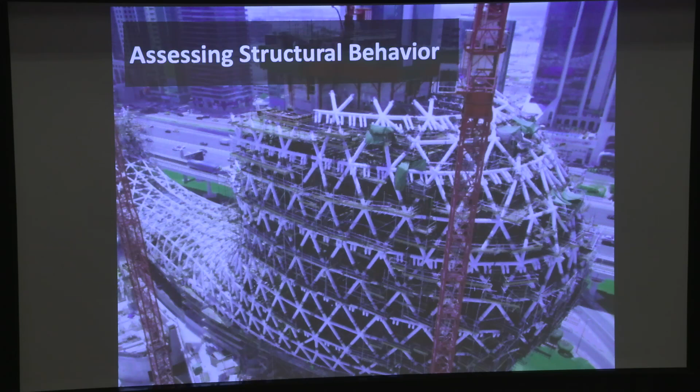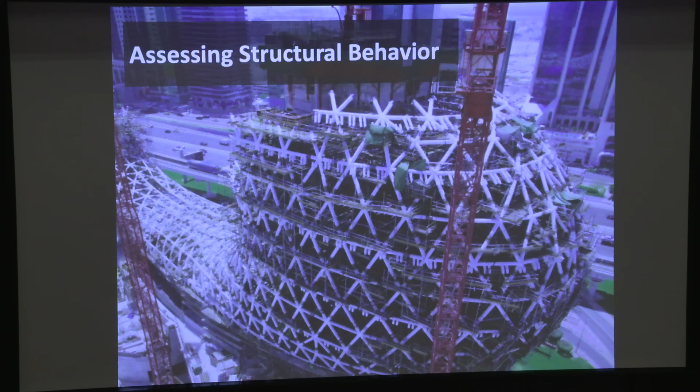So this is a Museum of the Future in Dubai, and I worked in the design of this building. It is a fascinating problem of optimizing a structural design that is extraordinarily complex, and at the same time making it fire safe using tools that belong to the 19th century. So this is the kind of things that we are looking into, and this is the problem that we were trying to address in the late 19th century.

So this is a fire in a factory. This is a timber beam, and these are the modern steel beams that were supported by that timber beam. In essence, as the fire progressed, the timber charred, so its degradation, its loss of cross-section, is extraordinarily slow.

But the steel is being heated up by radiative and convective heat transfer very rapidly, and very rapidly loses its mechanical properties, and you see it hanging off the timber beam as if it was pasta. So in essence, this is a problem that we were facing, and this is a problem of the 1850s, 1860s.

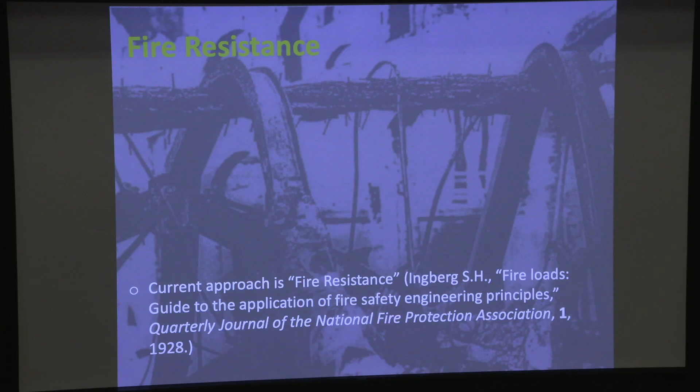So the approach that is used is called fire resistance, and it's due to Ingberg, who formalized it in 1928. Interestingly, this is the first attempt that fire people had at being scientific. This is page 1, volume 1 of the National Fire Protection Association journal. So this is our first attempt as fire people to try to be scientific in one way or another.

Now, the testing data is very, very sophisticated, and you can see it here. This poor man is trying to throw timber as fast as he can into this box to make sure he gets the hottest possible temperature.

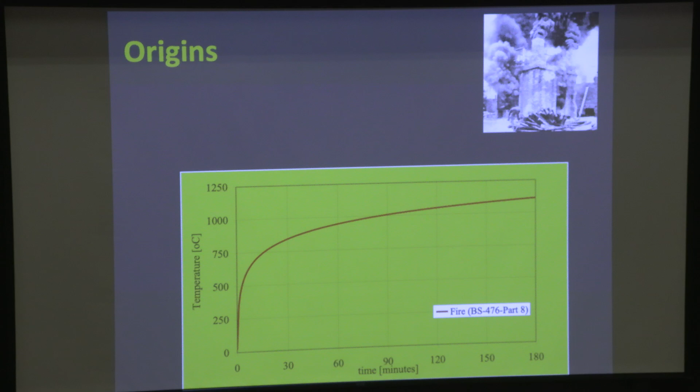He ran this experiment many, many times, and Ingberg collected about 40 years of data that had been collected mostly in the United Kingdom and the United States, basically trying to establish a worst-case scenario. So instead of trying to understand what was going on, all they did is pile up all the data and construct a mathematical function that served as the envelope.

That mathematical function is not a fire. It's just an envelope that is above all the data that you have available. Because it's not physical and it's a continuous mathematical function, it simply continues to progress into temperatures that become completely unphysical.

But you can actually say, given the data available at the time, this fire is the worst case scenario. A fire cannot be hotter than that. So if I reproduce that temperature in a furnace or oven, and I put my structural element and it doesn't fail, then I can argue with the knowledge they had at the time that if it doesn't fail for this red curve, it will never fail. That was the argument.

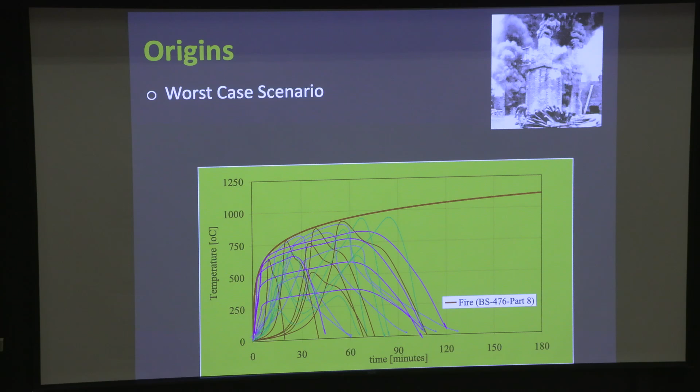Now, the other variable in heating is time. They recognized that as a function of how much fuel they threw in there, the fire will last either a short period of time or a long period of time. The more fuel, the longer the fire, the longer the heating period.

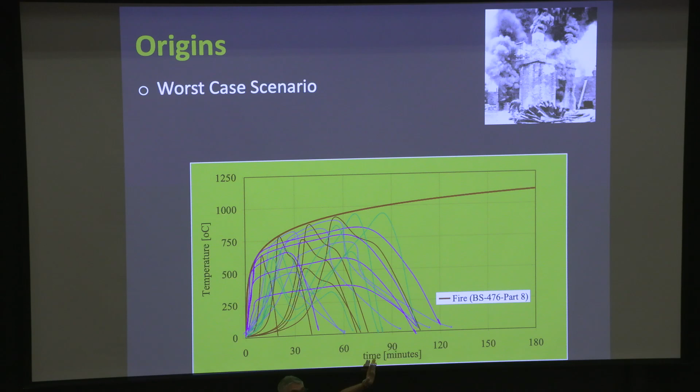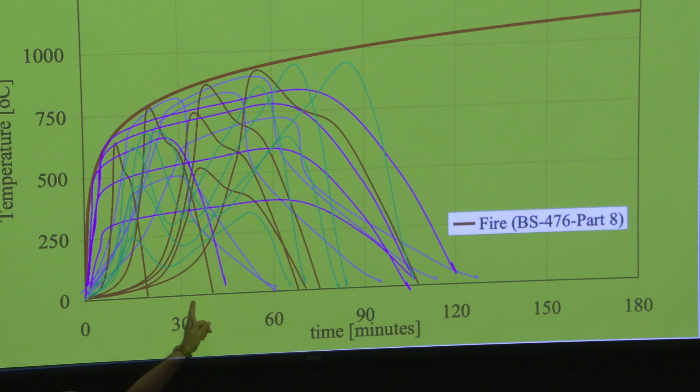So the insurance companies in the US went around measuring the quantity of fuel that different buildings had. They came up with an average quantity for offices, residential buildings, hospitals, and on the basis of that average quantity they said, for 60 kilograms per meter square on average, the fires last about 30 minutes. For 80, they last about 45 minutes.

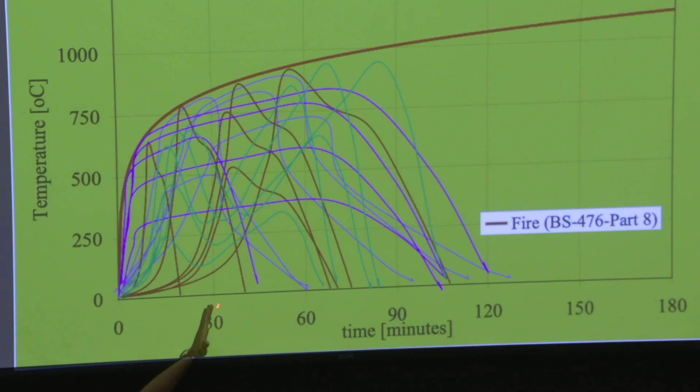And they set up a criteria saying, if the fire can only last 30 minutes for a residential building, then I'm going to heat my structural element for 30 minutes, because that's the longest possible duration that fire can have. So now I'm heating with the worst possible curve for the longest possible duration, which is burnout, all the consumption of the fuel. So if I heat my structural element for those conditions and it doesn't fail, it will never fail. That was the principle.

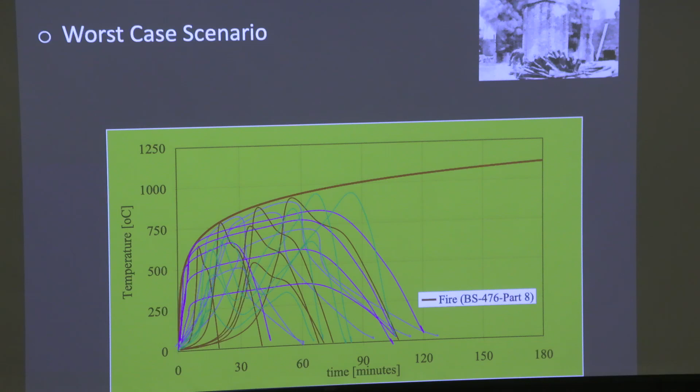Now, obviously, it has no physical basis. It is just purely a mathematical construct. But nevertheless, the curve defined by enveloping all the fires gives me the worst case scenario, and the required rating is defined by the total fuel consumption.

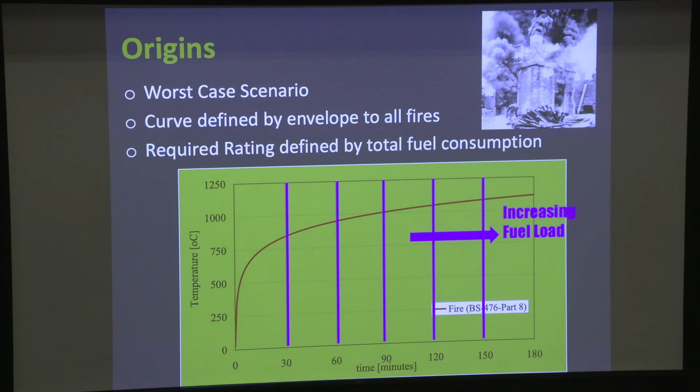So this is why when you design a residential building, they say your structural elements shall be designed to 30 minutes fire resistance, because residential buildings are expected to have a certain amount of fuel, the time for burnout is supposed to be 30 minutes, and they will be tested against this curve for 30 minutes. If you're designing an office building, then they will say 60 minutes, and it goes on in multiples of 30.

Now, if you have a very, very tall building in the center of Manhattan, you are designing the World Trade Center, then you say 4 hours. Why 4 hours? Because I know this is not so physical, so let's multiply everything by 4. So it's just a safety factor, you make it super conservative. So the reason why buildings don't fall down from the sky today is not because they're properly designed, but because they're so conservative that, as a result, you have these extraordinarily robust buildings.

The problem is that because you're not designing them in a physical way, then when odd things happen, like 9/11, you realize that you missed something.

And the actual design of the Twin Towers was a design that was extraordinarily vulnerable to fire, okay? So it was a very simple problem of simply saying rigid column, rigid core, very lightweight floor.

So what happens when you start heating up the lightweight floor? It tries to expand, but it is restrained by two very rigid systems. Remember all the columns? They were one after the other, so the perimeter columns were super rigid. You have this very rigid core, very rigid columns, and a very lightweight floor that is trying to expand, and it cannot because it's restrained. So because it cannot expand, it fails and it buckles.

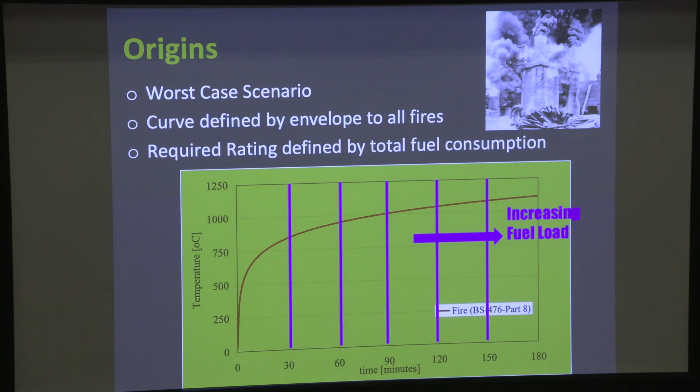Now, with this kind of method, you will never spot that. You will never spot the interaction between different components because all this is tested just in a furnace. So you will never see how all these things are interacting and how you can create massive loads just purely with thermal expansion that is restrained, which effectively creates a buckling process and brings the whole system down. So this is unphysical, but it has existed for 100 years. So the Burj Khalifa, as well as a residential home, are designed under this principle, and it has no physical basis.

So the final argument of this is that if you box the fire in one room, then everything around it is cold, and because it's cold, it's much stronger than the elements that are being heated up. So the loads can be redistributed into all the different systems, which basically means you can test one single element, and if that single element doesn't fail, you know that everything else around it will not fail.

Because most structural systems are completely redundant. Structural systems are indeterminate redundant structures, so you always have multiple paths for the loads. In essence, if all the different paths are stronger than the weakest elements, you can take failure of a single element and then consider that as your failure mode. Nothing will fail before that.

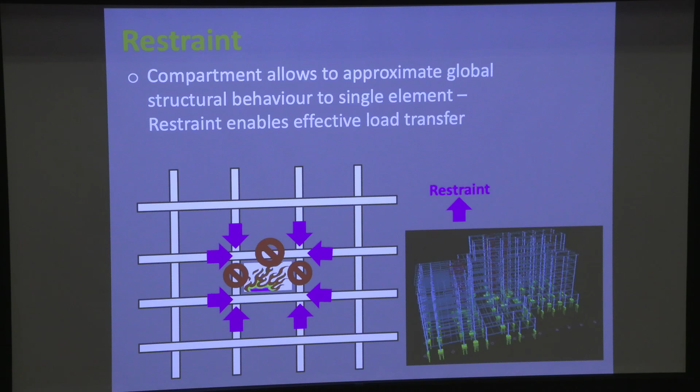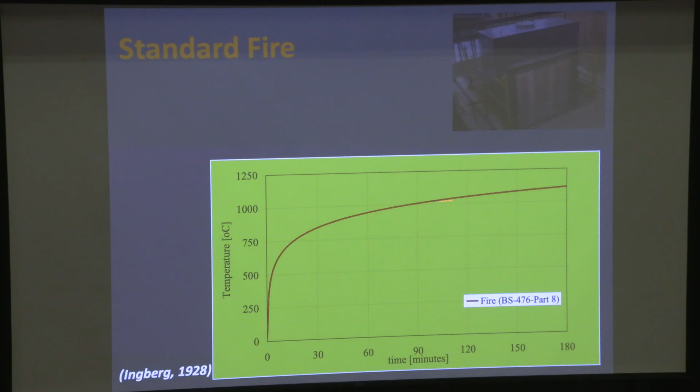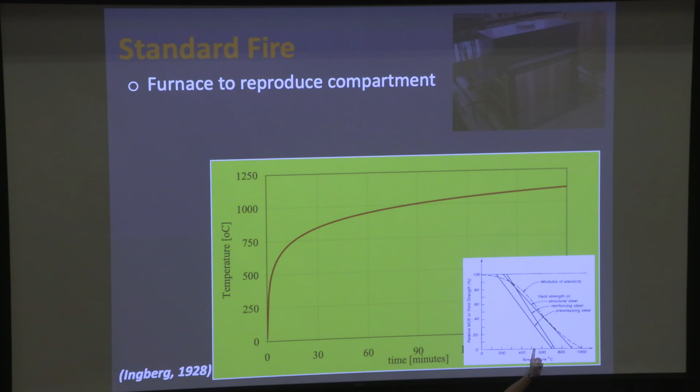So in essence, then you can do this: put it in a furnace. This is a typical furnace on which we test structural elements. Make the furnace follow the standard temperature time curve, and then you introduce your structural element. If it's steel, these are the material properties of steel, and what we're going to say is that when we lose 50% of the capacity of steel, which is about 500 degrees, then the steel fails. So you put your structural element in the furnace, you let it heat up, and then you take the failure temperature. In this case, this will fail at about 40 minutes, and for conservatism, you bring it down to the next 30-minute multiple.

So you will say that this structural element will have 30 minutes fire resistance. Now, if you're required to have 30 minutes fire resistance, fine, you can use it unprotected. But if you're in an office building and you're required to have 60 minutes fire resistance, you have to insulate it with fireproofing, so that you delay the heating until it exceeds the 60 minutes you are required to have.

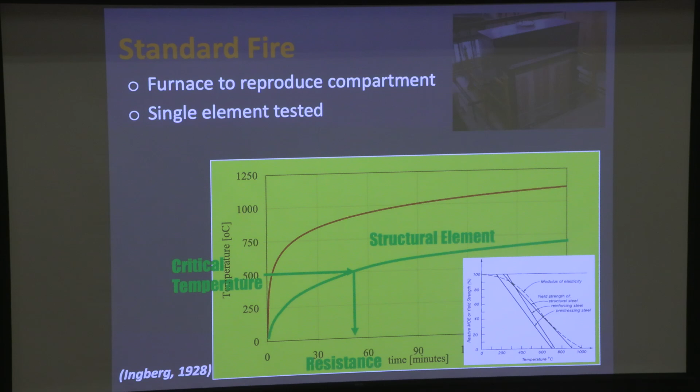A very straightforward and simple process defines a critical temperature as a function of the material properties, and that gives you the fire resistance, and it has to be above the multiple of 30 that corresponds to the required fire resistance. If you cannot achieve that, you insulate, and this is typical, the shotcrete type vermiculite fireproofing that you put on buildings.

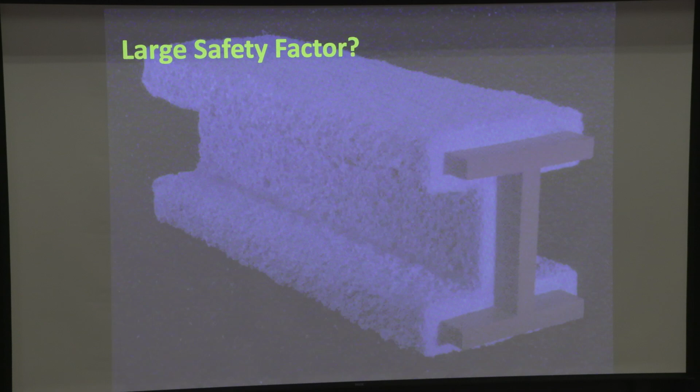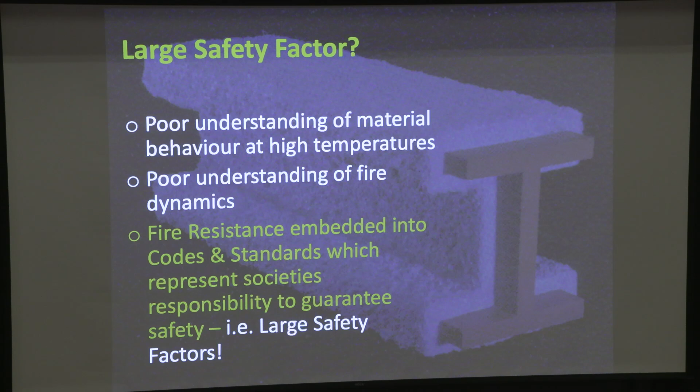At the time, we didn't know much. So fire resistance got embedded into the codes and standards, which effectively was used as a representation of society's responsibility to guarantee safety. Now, it is so conservative in nature for the majority of conventional buildings that you can get a lot of things wrong and this is not going to fail.

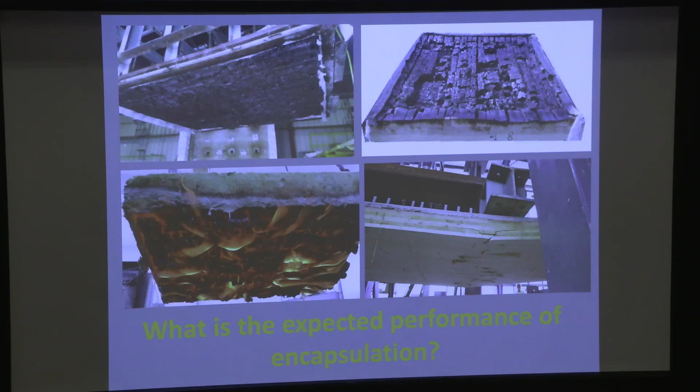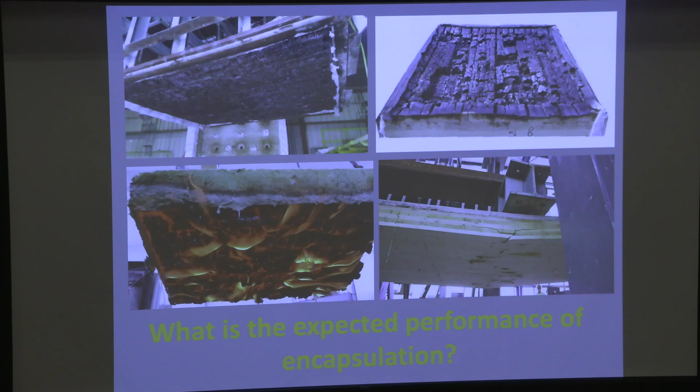So literally it's truly brute force. Now the problem is that we're doing pretty interesting things, and if we start doing encapsulated timber structures, we have to think in a slightly different, more sophisticated way. This is, for a while, the tallest timber building in the world, the Brock Commons in Vancouver, Canada, and this building relies entirely on this fire resistance methodology to design the thickness of the plasterboard that protects the timber structure.

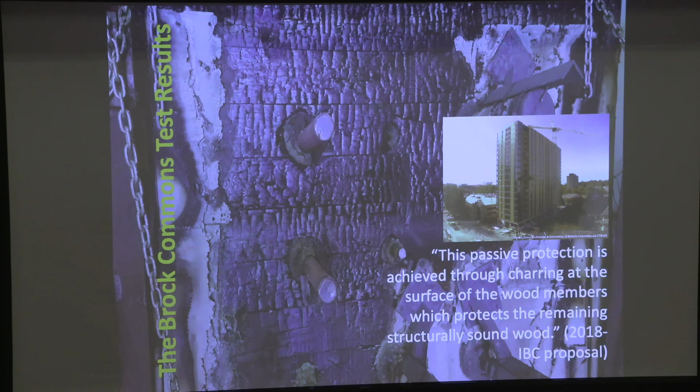So we're still using these very coarse methods, but now for situations where we really need a lot of refinement. We are allowing the timber behind the encapsulation to ignite and char, which is a very tricky thing, because what if it continues to burn on its own? Then you're not designing for burnout anymore. You are effectively failing to comply with the basic principle of design, that you want a tall building never to fail. So you have to design for burnout, but if you ignite the timber, when is it going to stop?

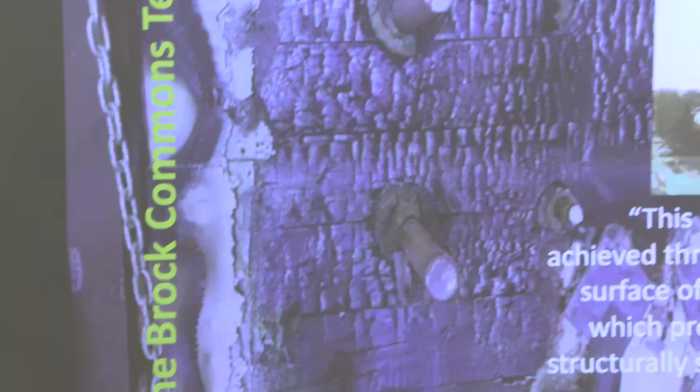The US has become really the biggest promoter of tall timber buildings. All the building codes in the US have relaxed completely all the rules regarding the use of mass timber for tall timber buildings. And as a result, unfortunately, we are going to have a lot of work, because I cannot see any other direction but a complete mess.

When you start using this type of very simplistic method to address very complex problems, you really have to be a bit careful. The collapse of the World Trade Center towers emphasized the need for better analysis, but unfortunately we didn't learn very much. Now, at some point in history, we had to learn.

And this is where rational thinking entered the picture. Now, which are the periods of history where society is most committed to the advancement of science? War. Yeah, during the Second World War there was a recognition that...

...it was much, much more effective to burn down a town than to simply bomb it. The level of morale deterioration you could create by creating fires was so much more extreme than just throwing bombs, that an enormous amount of effort was put into designing mechanisms to create as big a fire as you possibly could. So what happened?

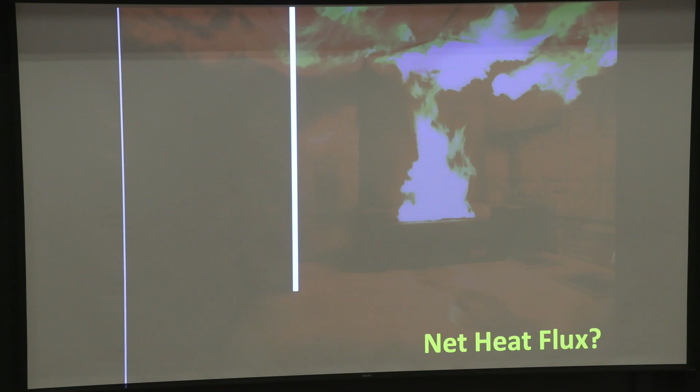So I showed you this the other day - basically this is a complicated problem, and we need to find this Q net. We need to resolve this set of integral differential equations that, again, are intractable. So as a result, we need to understand that this cannot be done, and we have to find something simpler.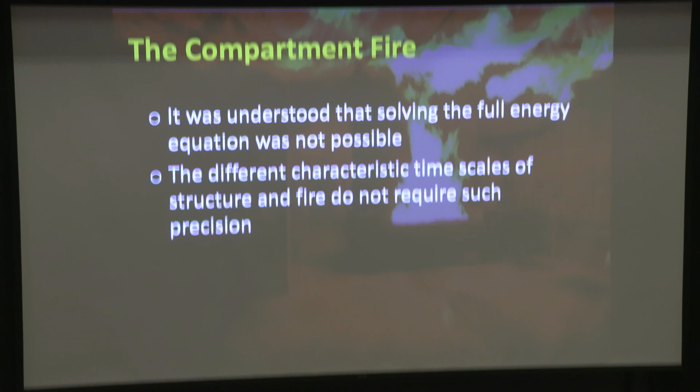Now the great advantage we have here is that the heating of a solid has a very long characteristic timescale, whereas the heating of a gas, or the fluctuations in a gas, have a very short characteristic timescale. So averaging the fire is perfectly fine, because any heat transfer into a brick wall has a timescale of hours - I don't need to resolve the milliseconds, or even the seconds, or even the minutes.

If I average the fire and treat it as a steady state event, it's okay if what I'm delivering is heat transfer to a solid that takes hours of heating. That difference in characteristic timescales enables us to simplify the problem, because you can treat the fire as a steady state problem.

This is a formulation called the compartment fire, and it pertains to typical compartments of the European nature. It was designed by Philip Thomas in Europe, and generally old buildings in Europe are very compartmentalized. Effectively what you have is a room, with windows, a door, and the bottles of champagne on top. The size of the room is generally very small. These are conventional 1950s buildings in Europe.

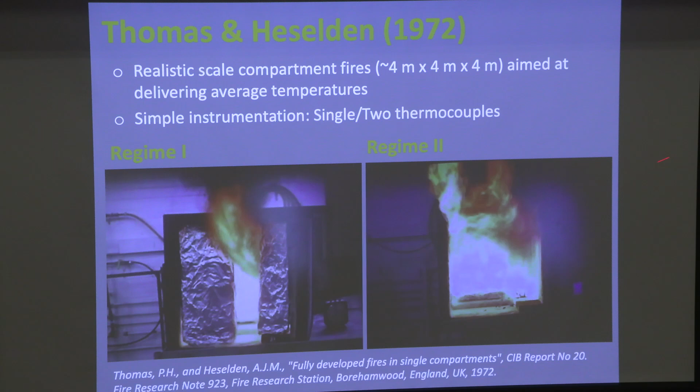Philip Thomas identified that there are two regimes in burning. This regime, which he calls regime 2, occurs if you have a big opening, then the fire becomes the pump. The strongest pressure difference is created by buoyancy at the position of the fire. What you get is this extraordinary complex fluid mechanics that brings fresh air at fast velocity, reaches the fire, hits the ceiling, and is spit out. So this is controlled basically by momentum driven by a buoyant flow.

To be able to resolve this problem, you actually need to do CFD. You cannot resolve it in an average way because it's a very dynamic problem driven by this fire that acts as a pump.

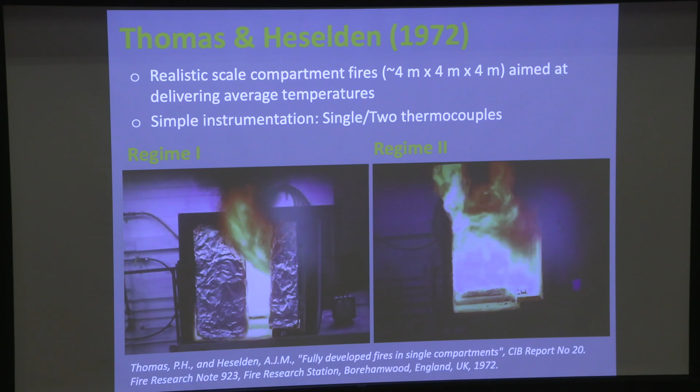Now, if you start shrinking the opening in a way characteristic of this type of building, and you end up with smaller openings, the filling of the room with smoke is so fast compared to everything else that the diffusion flame displaces itself to the outside. What you get inside the room, which is what's going to heat up the structure, is literally a box full of black smoke. The velocities inside the compartment converge to zero, and what you get is a static problem, where you have a box full of hot black smoke heated up by combustion that happens at the opening. That opening brings air in by hydrostatic pressure and expels flames at the top. But inside the compartment, your velocities are zero.

You can ignore Navier-Stokes and treat the problem as a pure hydrostatic problem.

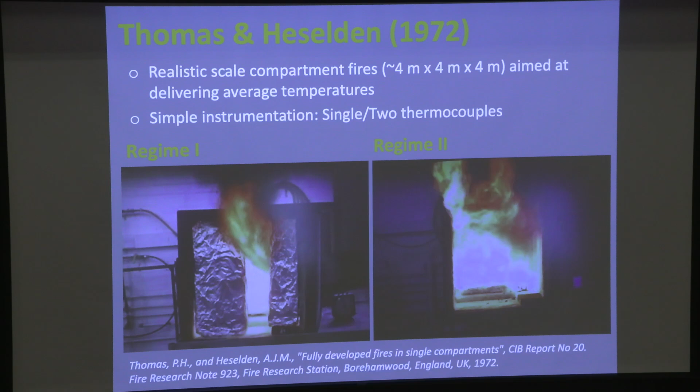So basically, his argument was that most conventional buildings in Europe correspond to regime 1 fires, and we are going to legislate so that all buildings are designed in a way we can calculate. In essence, buildings in Europe continue to be designed under the premise of small openings and small compartments.

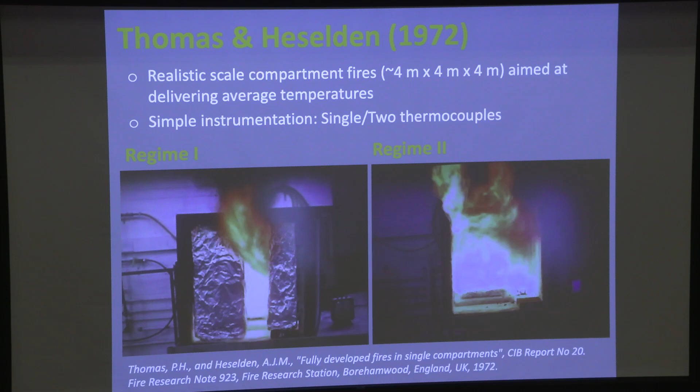So this is the way a regime 1 fire looks. Basically, air is coming from the bottom, and the flames are coming out at the top. Everything is happening close to the door, and inside the compartment, you don't get any velocities.

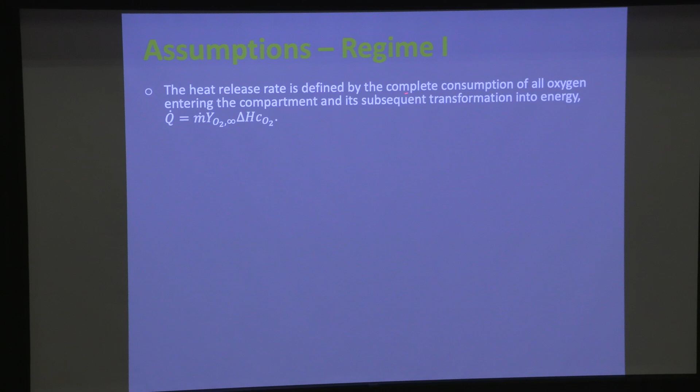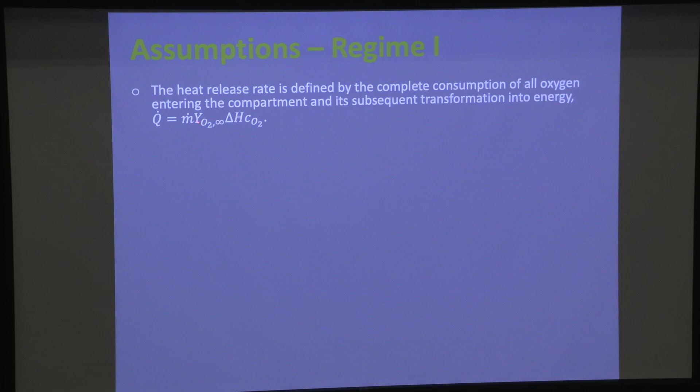So the assumptions that Thomas makes: the first thing he says is the heat release rate is defined by the complete consumption of all oxygen at the door. Effectively, your energy released into the compartment is given by the ambient oxygen concentration multiplied by the mass of air that comes in, multiplied by the heat of combustion per kilogram of oxygen consumed.

This first assumption eliminates the need to define oxygen concentrations, because you're consuming all the oxygen that goes in. It eliminates the need to resolve the oxygen transport equation, and limits the analysis to scenarios where there is excess fuel availability, which is regime 1.

They assume that the chemistry is fast enough to consume all oxygen transported into the reaction zone, and the control volume acts as a perfectly stirred reactor. In other words, it's all homogeneous, and the energy is distributed in the perfectly stirred reactor. The heat of combustion is assumed to be an invariant.

Now, the second assumption is that radiative losses through the openings are assumed to be negligible. They measured this, and showed they were about 3% of the total energy release, so they could be neglected.

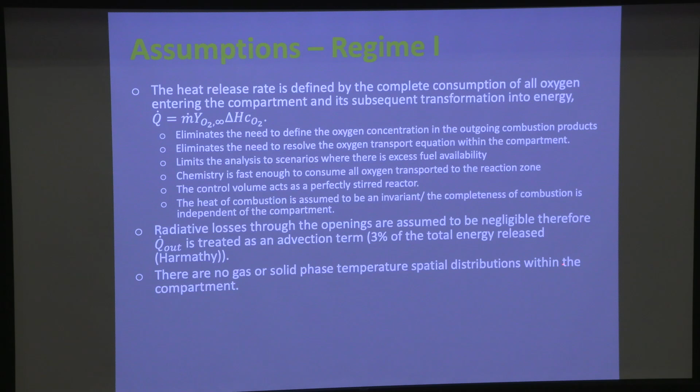There are no gas or solid phase temperature spatial distributions within the compartment. In other words, the whole compartment is a single temperature because it's a perfectly stirred reactor. You can use just an orifice plate approximation to calculate the mass flow of air entering the compartment at the door, and all velocities within the compartment are negligible.

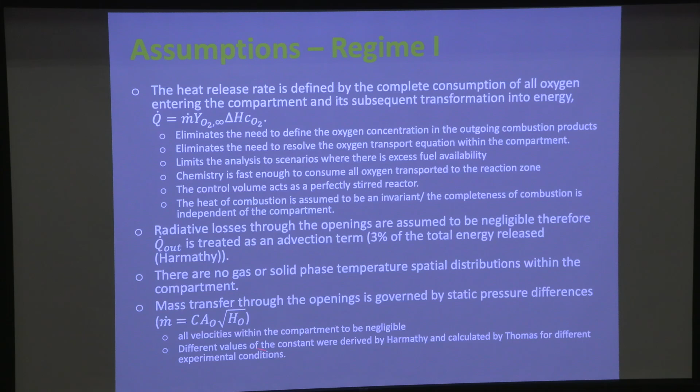And people derived the constants for different configurations—windows open, doors, and so forth. So this is the framework.

And in essence, what you get is, here's your compartment. Now I have only one temperature inside, which is TG max. So you spit out gases at that temperature, you bring air at ambient temperature, and the compartment is all at TG max. You lose heat through the walls, which is what you're interested in.

Basically the energy accumulated in the compartment is the mass of the control volume times Cp times TG max. The energy generated is the heat of combustion times the burning rate. But you're not going to calculate it using this expression. Instead, you're going to calculate it as a function of the consumption of oxygen that enters the compartment. So the energy equation is: the change of energy in the control volume equals the heat generation plus the energy in, minus the energy out, minus the energy transferred through the walls.

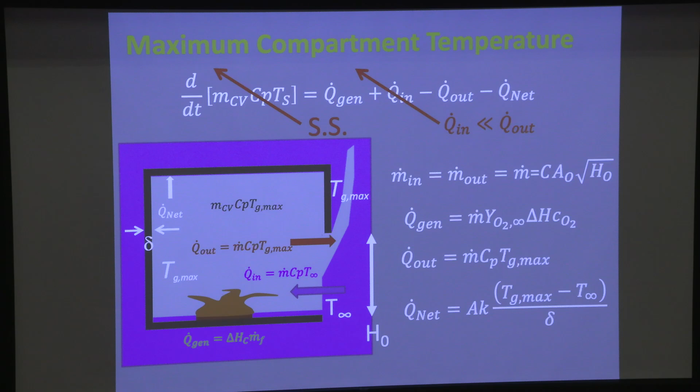And the mass in equals the mass out, orifice plate, the heat generation is oxygen consumption. The energy out is given by this, and the net heat is the total area that is not burning or not the openings—the total area through which heat goes through—multiplied by the thermal conductivity of the structural walls, and you linearize the conductive gradients. Delta is the thickness of the wall, and this is the temperature difference.

So basically, the equation, once you take out all the necessary terms, is this. And if you substitute the different values, you get the following expression, where effectively TF becomes the adiabatic flame temperature, and T conduction is a characteristic conduction temperature. So what you get is the evolution of the temperature of the compartment as a function of these two terms.

So in essence, a very simple equation gives you the temperature of the compartment. Now, the interesting thing is that if you look at these terms—T infinity, TF, T conduction—those are the only terms in the equation. TF is a constant and a constant, so it's a constant value, I don't have to worry about it. If you look at T conduction, it's a constant, a constant, a constant, a constant, and a constant—I don't have to worry about this either.

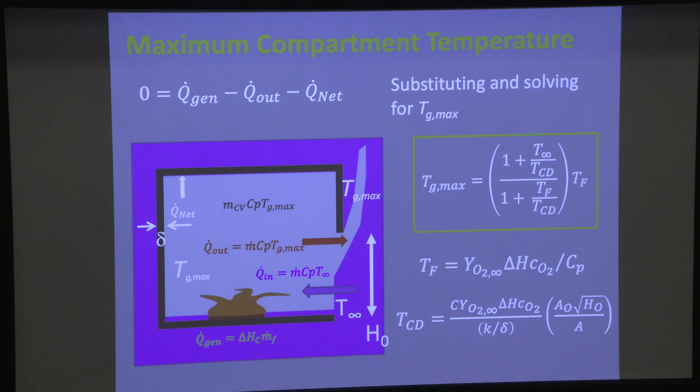And this is the geometry of the compartment: A is the area through which the heat goes out, A0 is the area of the openings, and the square root of H0 is the height of the opening. So if I'm an architect and I want to design a building, this is heaven, because all I need is the dimensions of the building, and then I know what the maximum temperature is going to be in that compartment. So I can design buildings in a very straightforward manner, only knowing the geometry. Everything else is a constant.

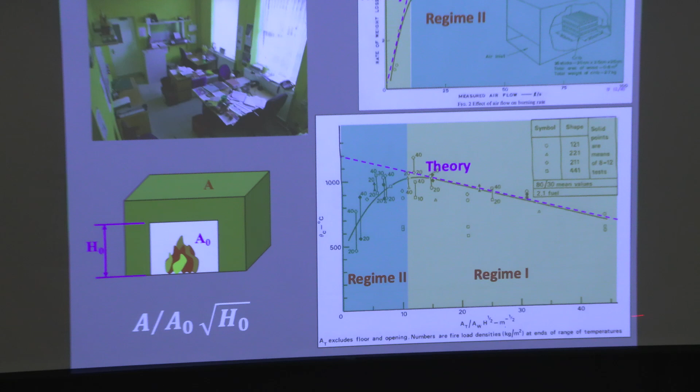So in essence, this parameter is what you label as the ventilation factor—the only parameter that controls the temperature of the compartment. If you plot the ventilation factor on the x-axis and the temperature increase on the y-axis, and plot all of Kawagoe's data, you find that the theory corresponds perfectly to regime 1, but as soon as the opening gets too big, the temperatures diverge from the theory.

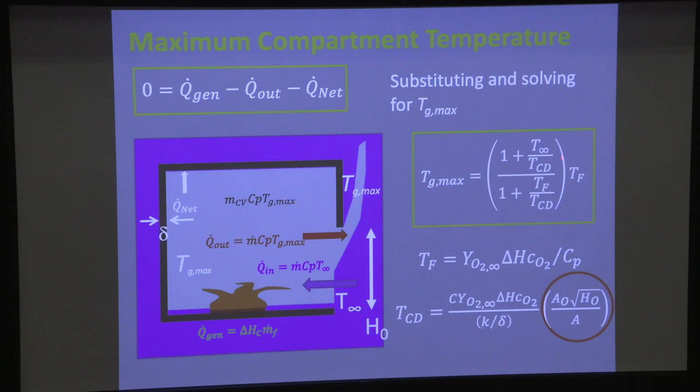So this is the equation that I had here, that for a very large ventilation factor is going to make this number very large, make this tend to 0. This becomes 1 and this becomes TF, adiabatic flame temperature. And for a ventilation factor that is very small, this approaches 0. So effectively, this number is very big. I can cancel the ones, the TCDs cancel, the TF cancels, and you get T infinity.

So in essence, if you go very far, you go to T infinity. If you go, in theory, all the way till the end, you get to the adiabatic flame temperature. So in essence, that's the theory, and the data matches very well in regime 1, but in regime 2, it goes all over the place.

What does Harmathy say? Hallelujah. This is brilliant, because in regime 2, all the temperatures are less. So the risk gets mitigated because this is a less onerous condition. So for these big compartments that we have in the US, we have a lot less of a problem than what the British have in their tiny little dingy rooms. So you can understand why nobody liked Harmathy.

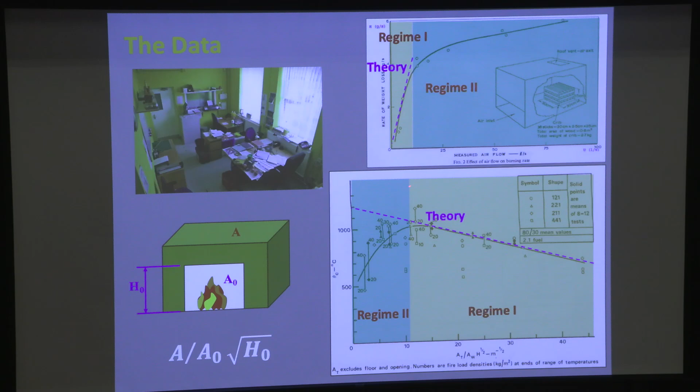So in essence, you could do that, and then by doing heat transfer to the fuel, you can basically calculate the same thing for the burning rate. So now, if I know the ventilation factor, I know the temperature. And if I know the ventilation factor, I know the burning rate. And statistics tell me how much fuel I'm going to have. So effectively, I can construct a fire.

And I can say that while it's burning, it will always be at TG max, a steady state, until total fuel consumption. And the total fuel consumption is the amount of fuel, a statistical variable collected by the insurance companies, divided by the burning rate that comes out from Kawagoe, that if you want to put it into an equation, is just simply this. And as you can see, it is also a function of the ventilation factor. This is kilograms of fuel divided by kilograms per second.

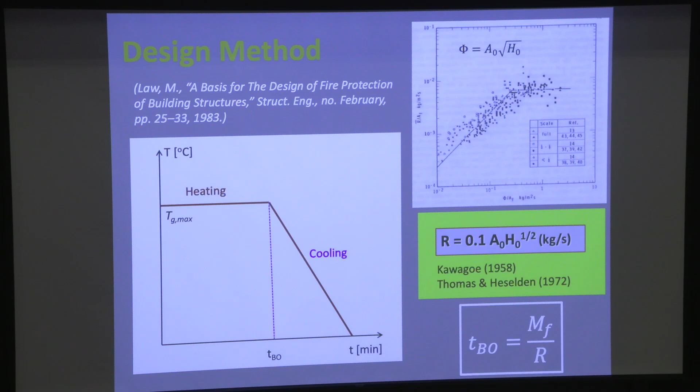So this is the time that it takes to burn out the fire, and I can heat up at a constant temperature. Now, I can approximate a cooling function and say, well, yeah, it's cooling. That's not too big of a problem. Let's just simply make it a straight line that is representative of cooling in a fire, in a compartment that doesn't have a fire anymore. So that's the way you end up designing, and as you can see, ends up being an incredibly simple expression.

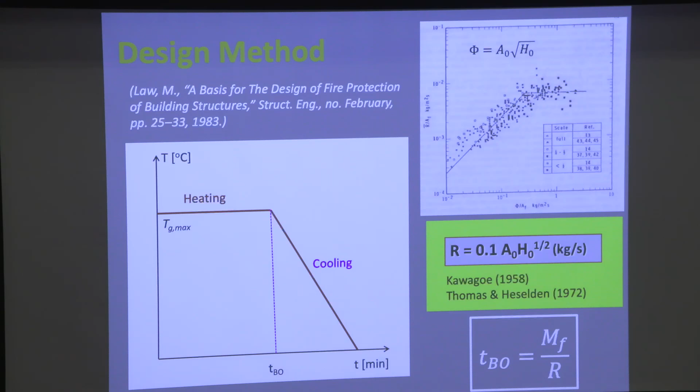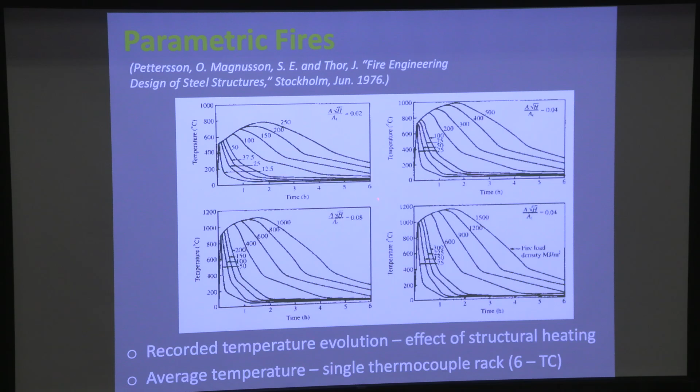Now, people have refined this, and you can use the data. So these are what we call the parametric curves, and instead of just using the maximum, the steady state, the peak value of the data, you can actually refine it by showing that actually the temperature increases, and there's only a short period where you get the peak. In Thomas, you will be treating this whole period as being the peak value, so it's conservative. So in the parametric curves, you're actually using the real data. But you can see the parameters are the same. It's still the ventilation factor. So again, it is exactly the same thing.

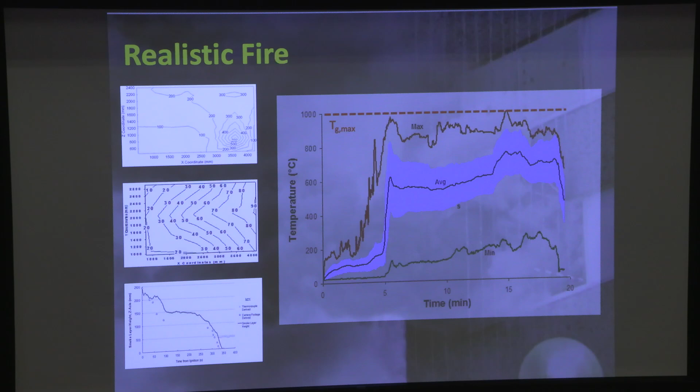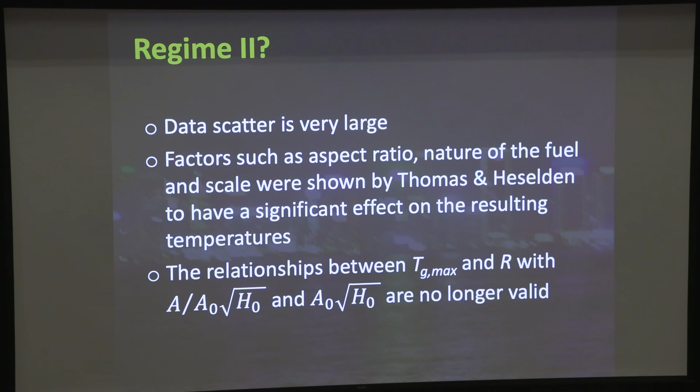Now, you can go to real data and run an experiment and basically establish what your temperatures are going to be, the maximum values, the minimum values, or you can actually measure directly your heat fluxes. All these things we can do to try to refine it, but they start getting more and more complicated. So regime 2, basically we decided to ignore it because the data scatter was very large. There's a lot of things that matter, but at the end, the only thing that we should carry from this is that if we're not in regime 1, this doesn't work. So these relationships with the ventilation factor don't exist because they're only valid for regime 1.

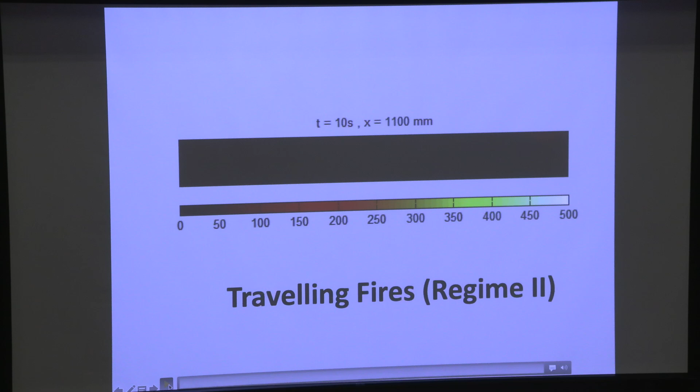So this is an example of what now has become quite well known, which is the concept of a traveling fire. So this is actually real data, experimental data plotted as a function of time, and it shows you an experiment where you have a very large compartment, as you will get in modern buildings. And you will see that these fires can follow a series of different patterns.

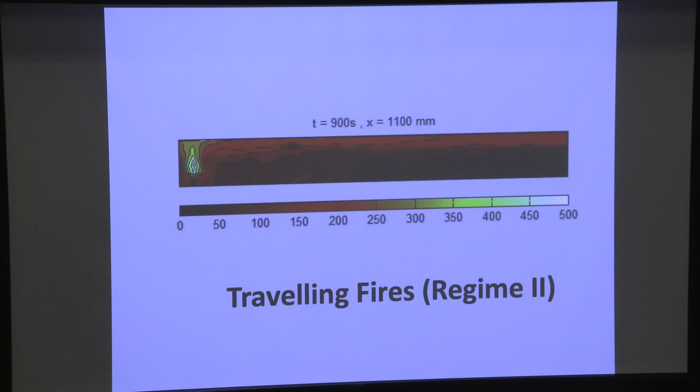So in this case, for example, these are discrete elements of fuel that are basically igniting, and the fire is propagating across the compartment. This is not regime 1. So this doesn't behave at all like regime 1. It's just a fire that is traveling around the compartment. So that's a traveling fire. Now, you can actually, under different conditions, get a growing fire, which is the transition between regime 2 to regime 1.

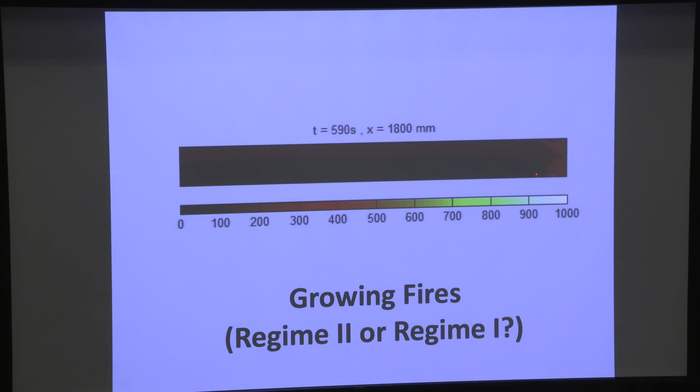So you can see how it starts here, and at the beginning it's slowly creeping through the fuel, traveling. But then eventually the smoke layer starts filling up the entire compartment and starts preheating the fuel. At some point you will start getting this instability, it starts fluctuating, and eventually you get flashover and the entire compartment burns out. So again, this is a transition between regime 1 and regime 2.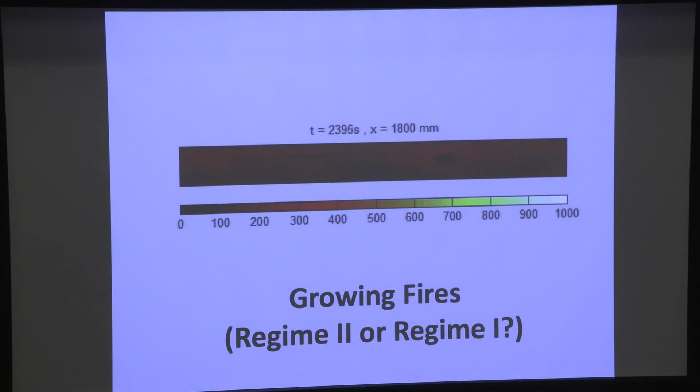Now, if you want to see it physically, and if the video actually works, this is an experiment where you can see the transition. So this is regime 2, and you can see how it's burning.

From the end of the wall to the middle where this column is, it took about 1 hour. So basically it's creeping along the timber that is burning on the ground. Check if you can use the camera and slowly move it across there.

The compartment without growing at all. So this is just purely a traveling fire.

Now, at some point, we changed the conditions. We basically put cork on the ceiling to reduce the area through which the heat goes, and we brought it straight into regime 1. So by the time you get to the middle, we have forced this traveling fire to migrate into an area that now is regime 1.

We changed the ventilation factor artificially to turn it into regime 2. Sorry, to turn it into regime 1, from regime 2 to regime 1.

Oh, I knew this was going to happen. Does anybody know why this happens?

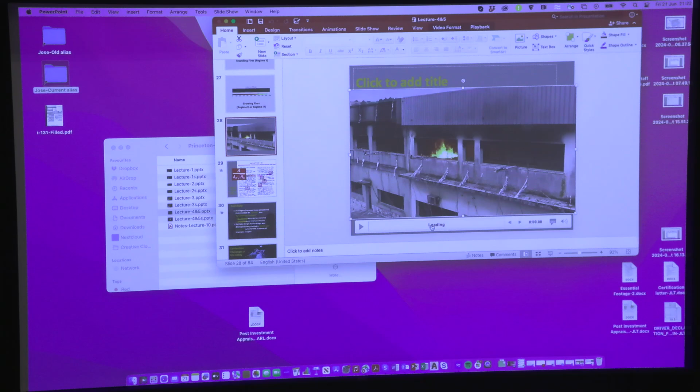So let me put it straight to where I wanted to put it. So you see a transition. So effectively, let me put it a little bit before that.

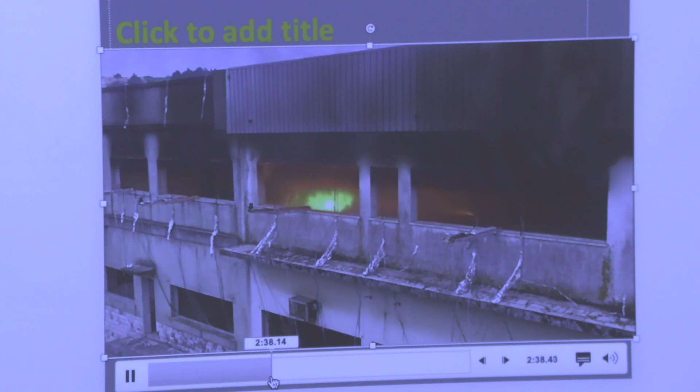So as soon as it passes the column, you can see how the smoke layer starts building because you've insulated the ceiling. And now the area through which heat is lost is only the walls. And you see how the smoke layer descends, and you've moved from regime 2 to regime 1.

So to be honest with you, if Harmathy would have seen this, he would have done the wave. Because in essence, this demonstrates the different level of intensities of regime 2 with respect to regime 1 in a very, very large compartment.

Okay, so you can see this is now back to a regime 1 fire, and you can see that again the flaming is outside, and inside you have a compartment that is filled up with black smoke, and the transfer of mass is only happening at the opening. So it's purely hydrostatic.

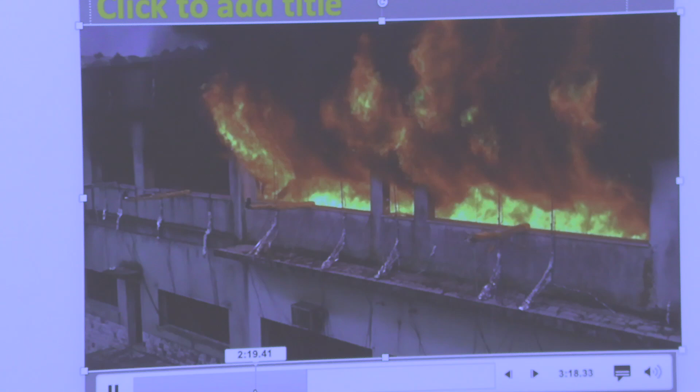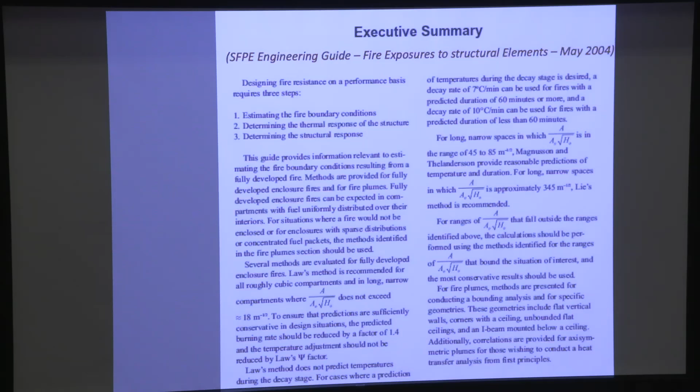So through the years, people have been trying to improve this, and I got this from the Society of Fire Protection Engineers. You will see, if you read the text, how as we progress, different researchers took this ventilation factor and the critical value of the ventilation factor as established by Thomas, and they started extending it.

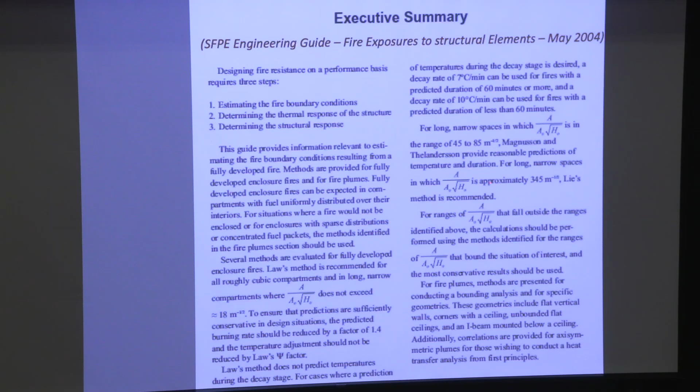Margaret Law was the first one. Then, a little bit further, Magnusson and Thelandersson extended the range even further. And it keeps going. Different researchers keep doing this, basically keep playing with the range of validity of this ventilation factor for regime 1.

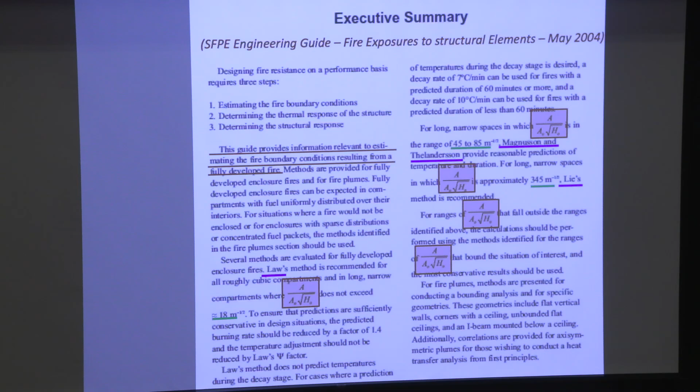So people have been expanding this through the years, but in essence, the concepts remain the same. If you are not in regime 1, then you cannot use the ventilation factor. But if you are in regime 1, then you have a very elegant solution to a very complicated problem, and that solution, while conservative, is actually really quite effective and is based on physical parameters. So a lot of people have played with this.

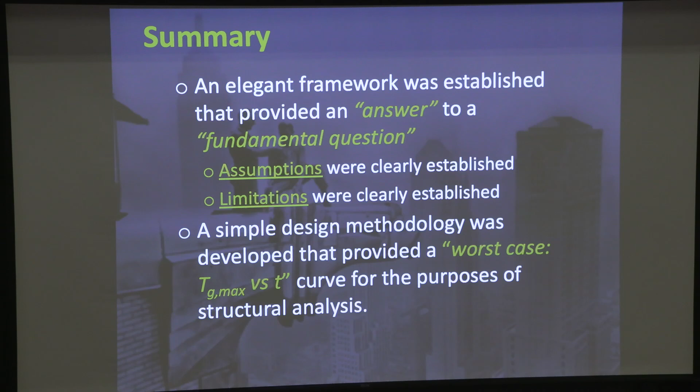So to summarize, this is an elegant framework that provides an answer to fundamental questions. You state very clearly what your assumptions are. You state very clearly what your limitations are. And basically, you create a very simple design methodology that allows you to establish a temperature versus time curve that is actually physically based, as opposed to that weird standard temperature time curve that has no physical basis and is just a mathematical function. And the two of them are very different.